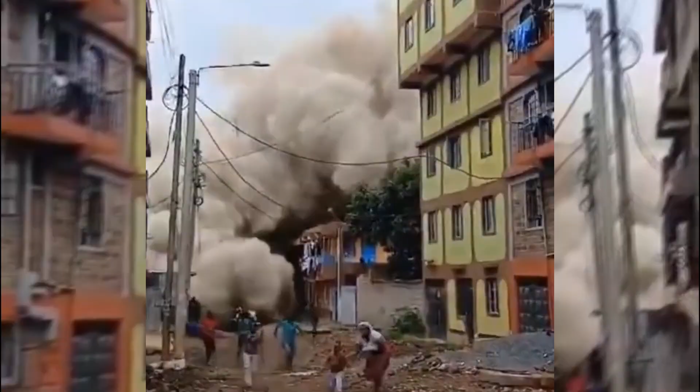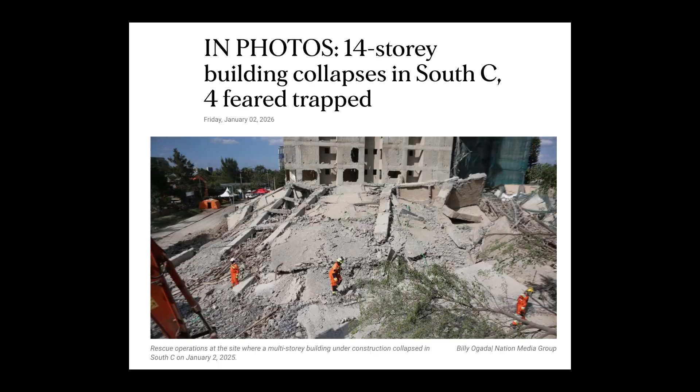14 stories, thousands of tons of concrete, gone in seconds. In January 2026, the South C neighborhood in Nairobi was shaken by a disaster, but 14-story giants don't just fall down by accident. Physics doesn't make mistakes, people do. Was it the heavy rains? A greedy developer skipping safety checks, or a fatal flaw deep in the foundation? Today we are digging through the rubble. We are going to find the point of failure.

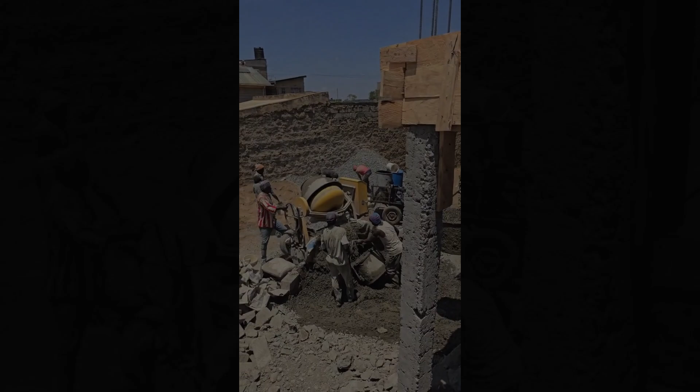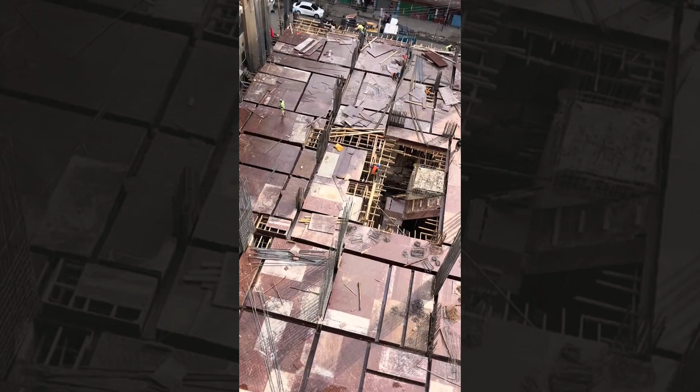To understand why it fell, we first need to understand what it was. This wasn't just any building. It was a symbol of ambition, a 14-story residential tower rising in Nairobi's South C. For months, it stood as a testament to modern engineering, a promise of new homes. But beneath the rising concrete were the seeds of its destruction already being sown.

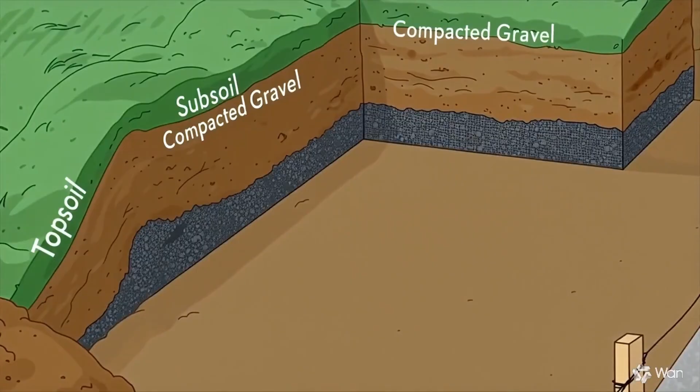Every skyscraper, every multi-story structure begins with a silent battle against one fundamental force: gravity. And that battle is won or lost, not in the penthouse, but deep underground, in the foundation. Reports from the region often highlight concerns about rapid, unregulated construction. Was this building an outlier or a symptom of a larger issue? So what was the precise point of failure for the South C building?

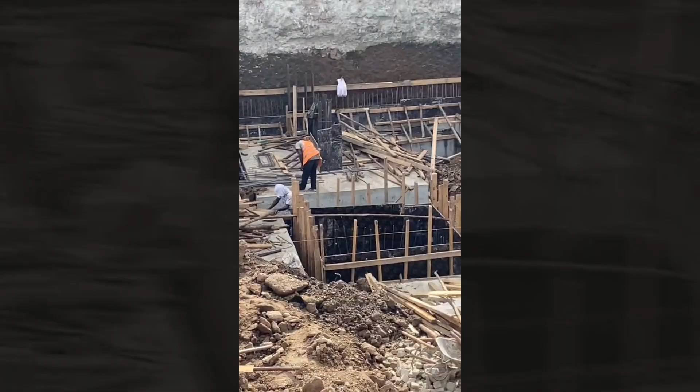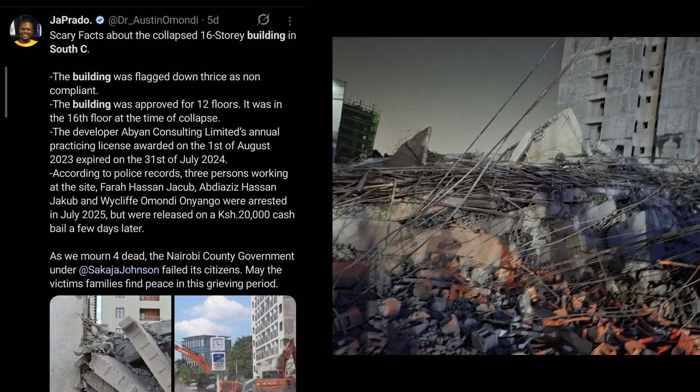While official investigations are ongoing, early analyses and expert opinions point to a devastating combination of factors. Eyewitnesses and local reports sometimes speak of shortcuts, of materials compromised, or of foundations laid on unstable ground. These are the whispers before the roar. But what exactly went wrong here? What was the critical flaw that turned a towering ambition into a pile of dust?

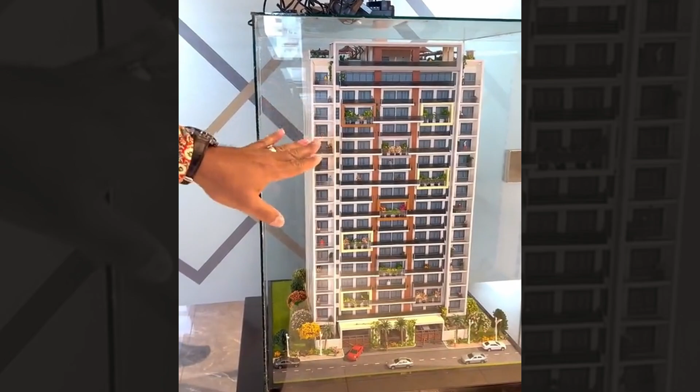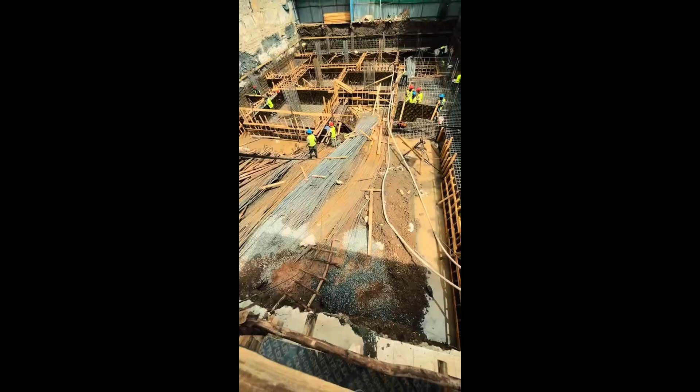Every structure, from a small shed to a 14-story tower, is a delicate balance of forces. At its core, it's about load, the total weight pushing down, and the ability of the materials to withstand that stress without experiencing too much strain. The entire weight of the building, every floor, every beam, every person, is funneled down through its columns and walls, ultimately resting on one crucial component: the foundation. This is where the immense force of compression is transferred to the ground.

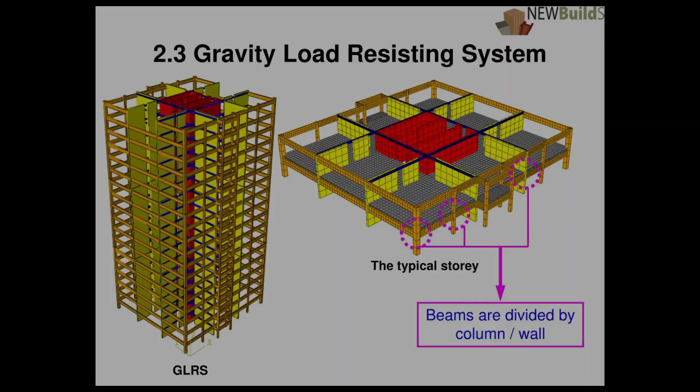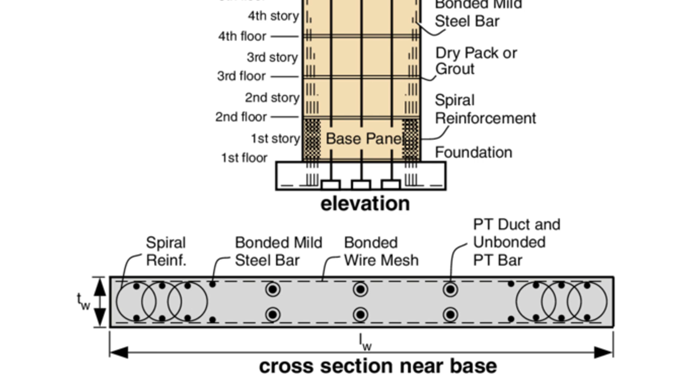Foundations aren't just concrete slabs. They're engineered to distribute that colossal weight over a wide enough area to prevent the ground beneath from failing. Think of it like standing on snow. Spread your weight and you don't sink. But what if the ground itself isn't strong enough? Or what if external factors like heavy rainfall drastically reduce its bearing capacity? Waterlogged soil loses its ability to support weight, turning solid ground into a treacherous sponge.

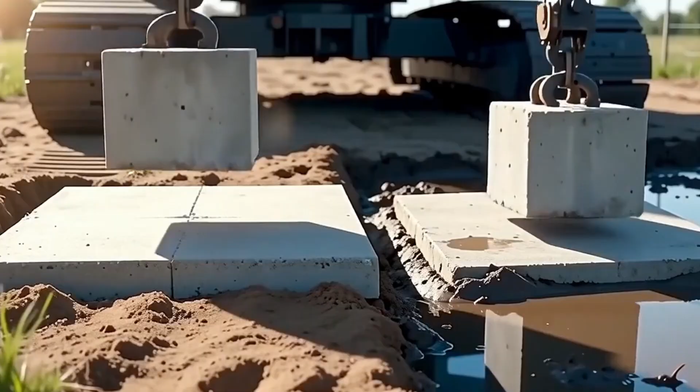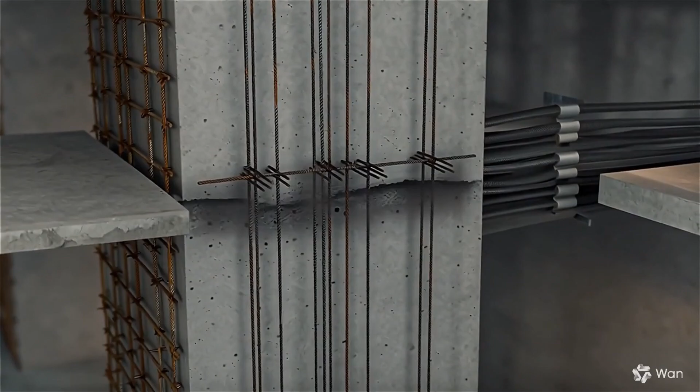Then there's the issue of structural overloading. Imagine a column designed for 5 floors, but it's asked to support 14. The materials themselves, whether steel or concrete, have a yield strength, a point beyond which they deform permanently and ultimately fail. Concrete is strong in compression, but weak in tension. That's why we add rebar, steel reinforcement, to handle the pulling forces. If the rebar is insufficient or of poor quality, the entire system is compromised.

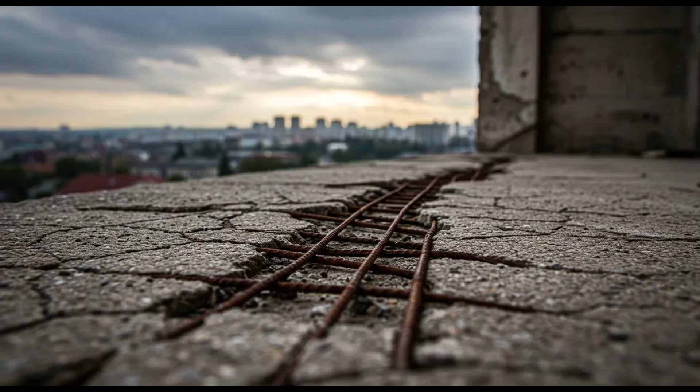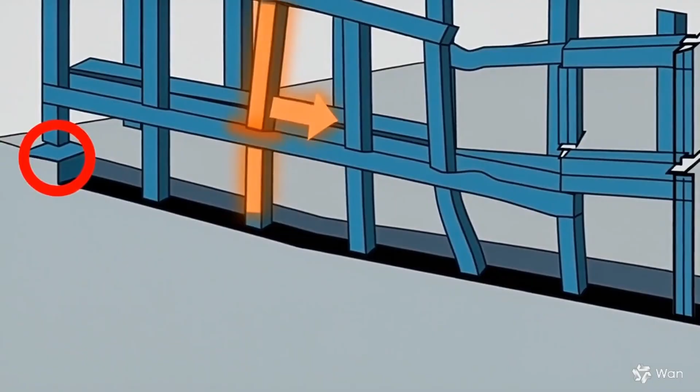These failures don't always happen instantly. Often there are subtle signs: hairline cracks, uneven settling, or a slight tilt. These are the building's desperate cries for help, warnings that the forces are winning the battle. In the case of the South Sea collapse, investigators are looking at a combination of these factors. Was it the soil, the design, the materials, or a perfect storm of all three that led to its ultimate demise? The answer lies in understanding the precise moment when the forces of gravity finally overwhelmed the structure's ability to resist.

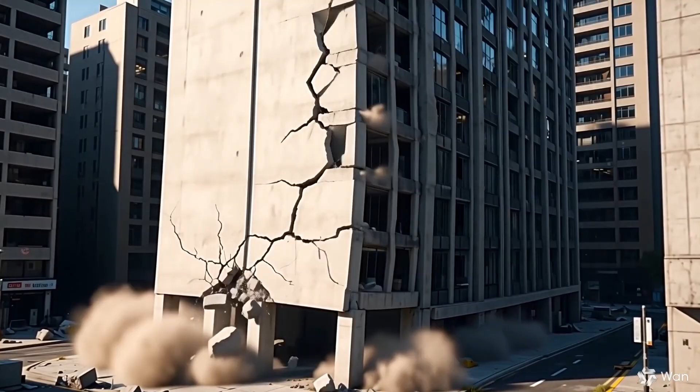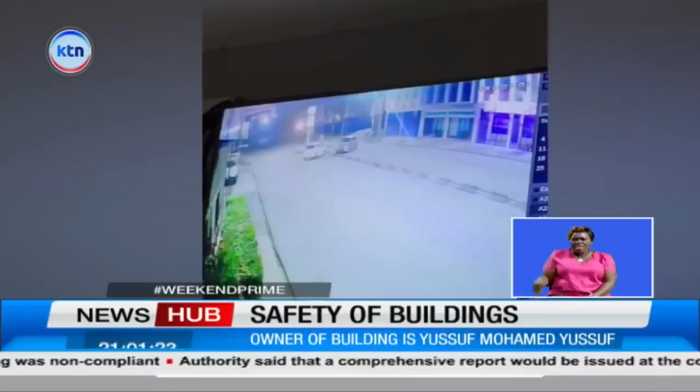Witnesses described a terrifying, deafening roar as the 14-story structure simply fell. In a matter of seconds, years of construction, millions of dollars, and untold dreams were reduced to a monumental pile of rubble. The point of no return had been crossed, and with that, the battle was over. Gravity, unforgiving as ever, had claimed its victory. The silence after the roar was deafening, broken only by the frantic calls of rescue workers and the wails of those who had lost everything.

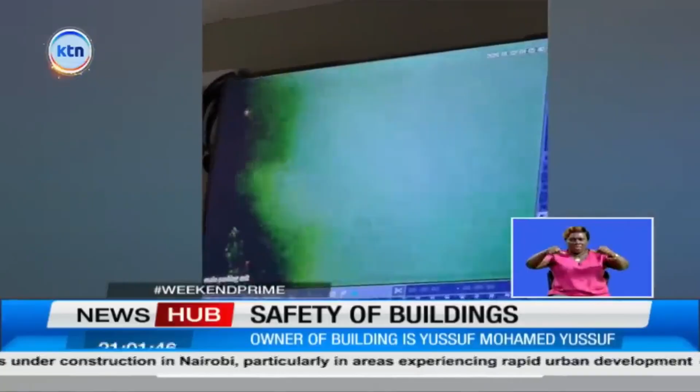Investigations immediately began, with structural engineers poring over every detail, seeking to officially pinpoint the precise point of failure. The South C disaster, much like countless other structural failures globally, serves as a stark reminder of the immense responsibility held by architects, engineers, and city planners. When corners are cut or regulations are ignored, the laws of physics will eventually assert themselves with brutal finality.

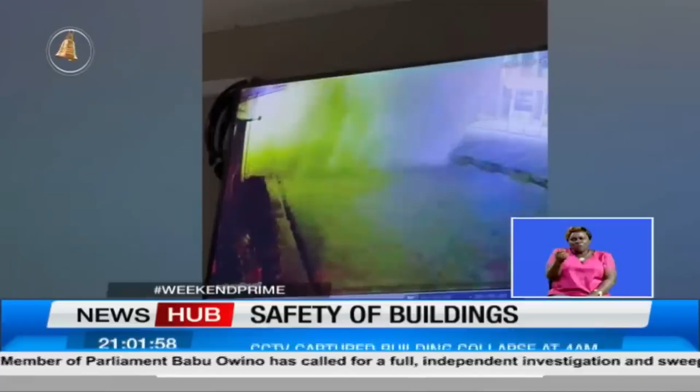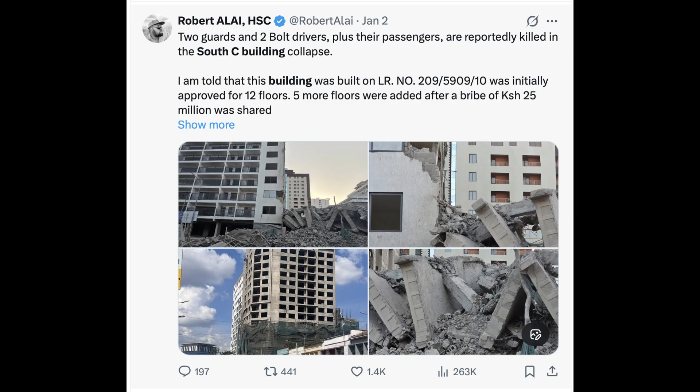The collapse of the South C building wasn't just a physical event, it was a human tragedy. Lives were lost, families were displaced, and a community was left grappling with unimaginable grief. Each piece of twisted metal and shattered concrete represents a broken promise, a shattered dream. But beyond the immediate devastation, the aftermath also brings a critical period of reckoning.

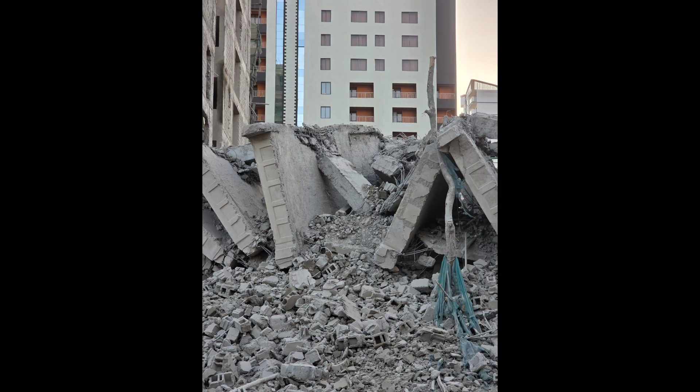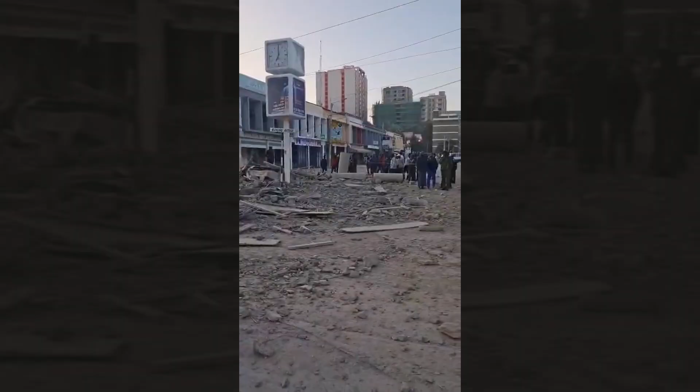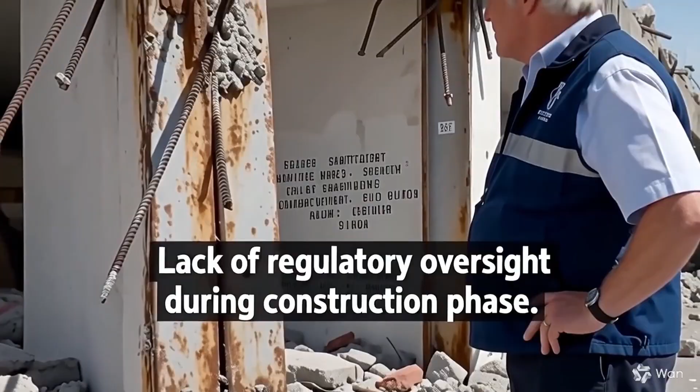Recall our discussion of compression and unstable ground. Imagine the 14 stories above, pushing down with unimaginable force. If the soil beneath wasn't properly assessed, the ground simply couldn't bear the load. Reports often highlight the use of substandard materials and inadequate rebar. If the steel within the concrete wasn't strong enough, or if the concrete mix was poor, the building's internal skeleton was inherently weak. This is where the concept of structural overloading becomes tragically clear. A single weak point, a poorly constructed column, a section of compromised rebar, or an undermined foundation can initiate a progressive collapse. One failure triggers another.